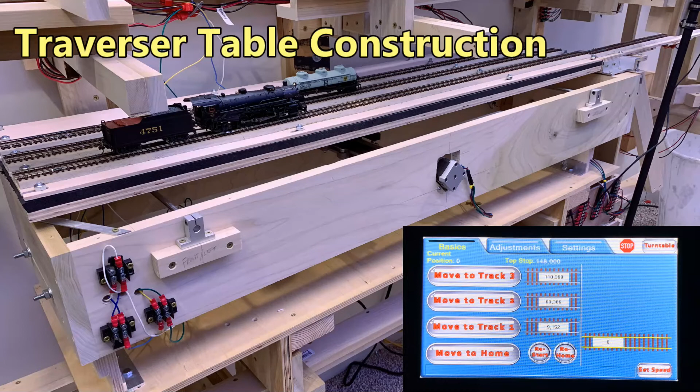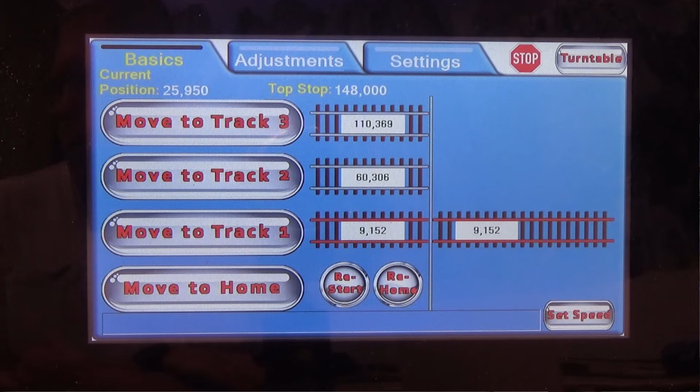So here's the final product in action. Is the view worth the climb? Yeah, I think so. We're going to see how to build a 3-track traverser table. A traverser table is a flat table that moves back and forth to align with stationary tracks on either end. It allows you to shuffle cars between the tracks without having any ladder tracks. I use it to stage trains for entry onto the layout and to receive trains coming off the layout.

Keep in mind that this is just my way of building the thing. Other folks have been successful using other techniques.

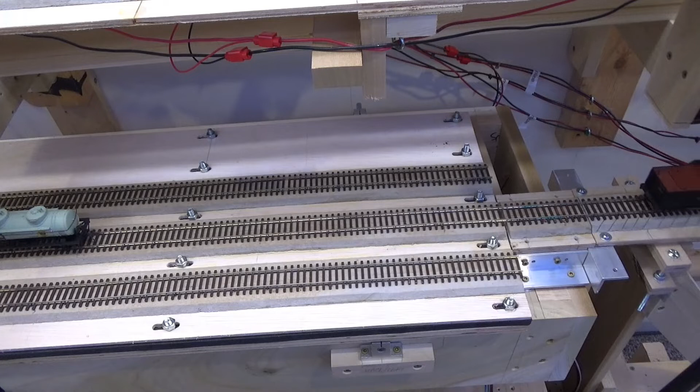What do you get for your efforts? A 3-track traverser table. There is one exit point to the right. A motorized table movement. We use a cool stepper motor for that. A touchscreen panel. We get a control panel with graphical buttons that work like an iPhone. Reliable operation. The control system hits the track stops every time. Ability to fine-tune the alignments. You can dial in the alignments darn close.

Before we get too far, let's talk about money. This is not a cheap project, but it's not $1 zillion either. It will likely cost you a few $100s plus your time. You'll need wood, bolts, screws, wire, USB cables, and some aluminum L-angle that's all easy to find and kinda cheap. We'll cover the special parts you'll need as we go along.

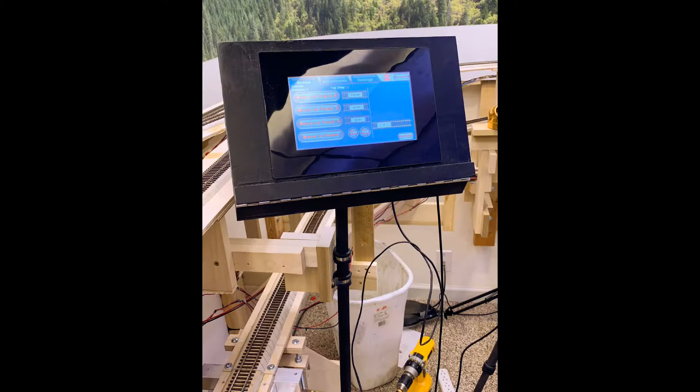I built the control system first. Ignoring the pole, it looks pretty sweet. The user interface has 3 panels. While on one panel, you switch to another by touching a tab at the top of the panel. The Basics panel shows you where the table is with relation to the transition track. Push a button to align the transition track to one of the 3 tracks.

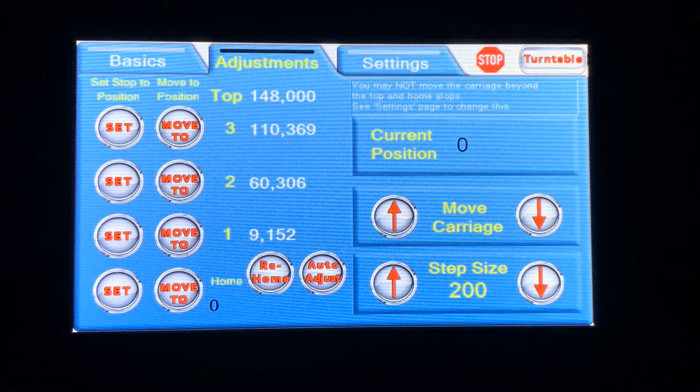The Adjustments panel lets you nudge the table up or down to line up one of the tracks with the transition track. Then you can set a track stop. Use the Settings panel to save your stop information for reuse later. We use free software to program the device, but we won't show any of that today. I'm sure you'll be happy to hear that.

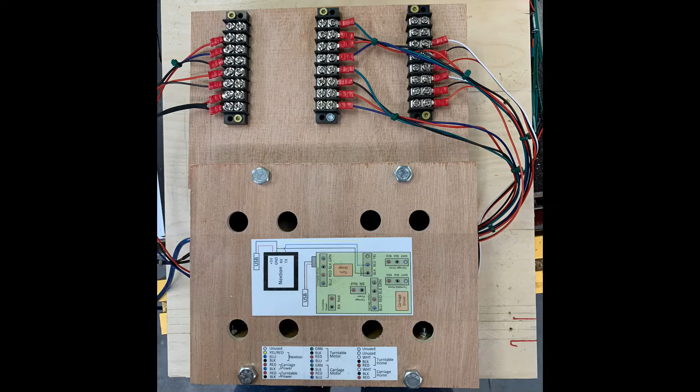All of the components for the control circuit are wired onto a single PCB board to which all the inputs were connected. The control system is driven by a custom program that is stored on an Arduino microcomputer, but we won't show any of that today either. If you build and test the control system first, you can run tests when building the physical table.

Here's the special parts you'll need for the control system. An Arduino Mega; you'll store your control program on this microcomputer. A PCB board. I use this version, but others exist. A power supply. This one is likely oversized, so choose your own. The Nextion touchscreen unit. Get this version because it comes with a nice enclosure that easily mounts in a rectangular space cut into wood. Stepper motor and driver.

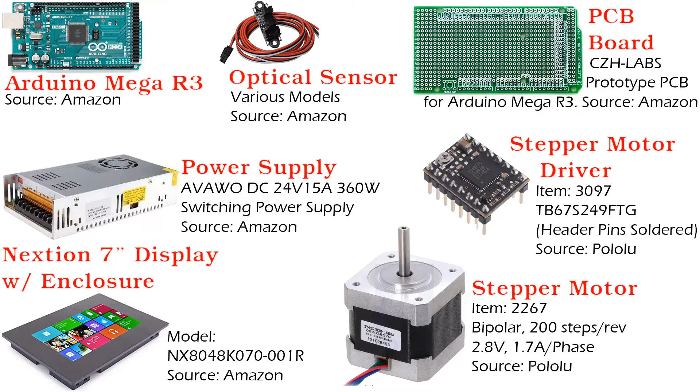Get these specific doodads because 1, they work great, and 2, my control program is coded to drive these specific devices. An optical sensor. This is used to find the home position. Amazon has many models.

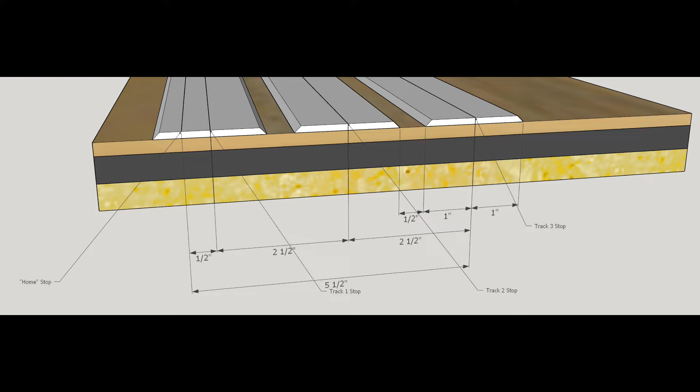Here's a model illustrating the travel distance of the traverser. The tabletop has a home stop a bit to the left of the stop for track 1. This is the leftmost limit of movement as viewed from this end. The rightmost limit of movement is the stop for track 3. The distance between these two is defined as the travel distance, and mine is 5.5 inches. I added a cushion of 3/4 inch to get what I call the working travel distance of 6.25. We need this number to decide which linear actuator kit to buy.

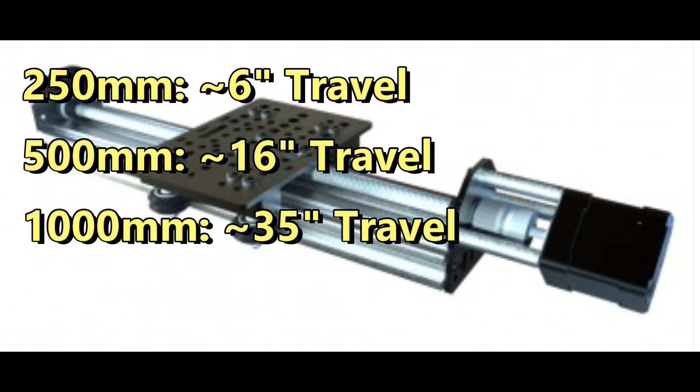Here's the traverser with the tabletop and the transition track removed. That centerpiece is called a linear actuator, and it causes the table to move back and forth. A vendor sells complete kits to make these. The Linear Actuator Kit is sold by OpenBuilds, and it's called their V-Slot NEMA 17 Linear Actuator Bundle Lead Screw. The vendor offers models with these lengths, and each has the travel distance shown here. The 250mm version looks like it might work for me.

You should order and build your kit before you do any more design work, so you have some important dimensions for subsequent design work. Here's the most important parts of the kit. Thankfully, the vendor has a video showing how to assemble it.

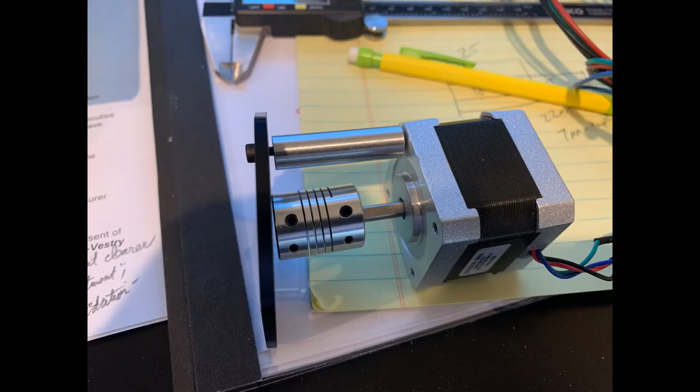But we aren't building a 3D printer, are we? No. So you do not want to just blindly follow their instructions. You need some more information to pull this off. First, I think I found a mistake in the kit.

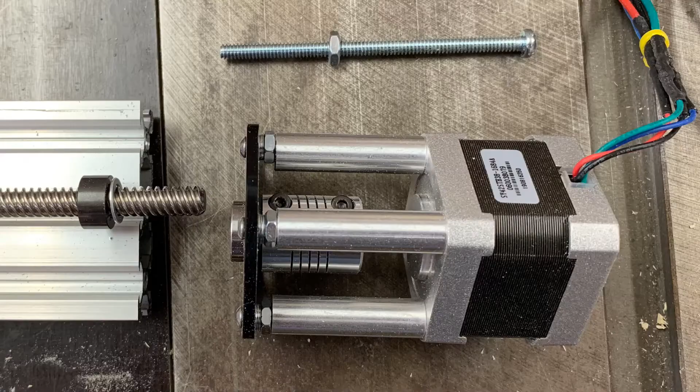The stepper motor is supposed to attach to the front end plate with 3 supplied screws. However, as you see in this photo, the screws are too short, and the long spacers are also a bit short. To fix this, I got some longer screws and used them and some jiggered up spacers to get the stepper motor properly mounted. It's no big deal, it's just something you need to fix.

The kit ships with some number 10 self-tapping screws, which the video says to use to attach the end plates to the V-Slot rail. Throw them away. Don't use them. We need the holes in the end of the rails to be tapped with machine threads down about 1 inch. Again, do not use the included self-tapping screws.

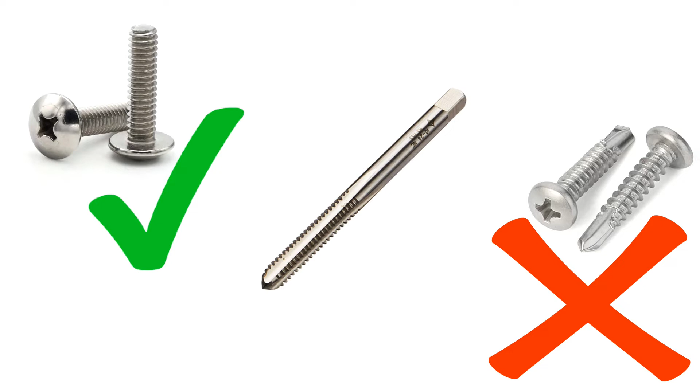Tap the holes down 1 inch with a 10-24 tap and then use number 10 machine screws. Use number 10 machine screws of about 3/4 inch length to temporarily attach the end plates to the rails. We'll replace them later with longer screws and some nuts.

At the end, the video shows that the lead screw ends nicely at the back of the unit. Well, my lead screw didn't. It extended out the back a little bit. I don't know, I don't care at this point. Enough of the scary stuff. Just watch the vendor's video with a few extra screws and spacers and you'll be fine.

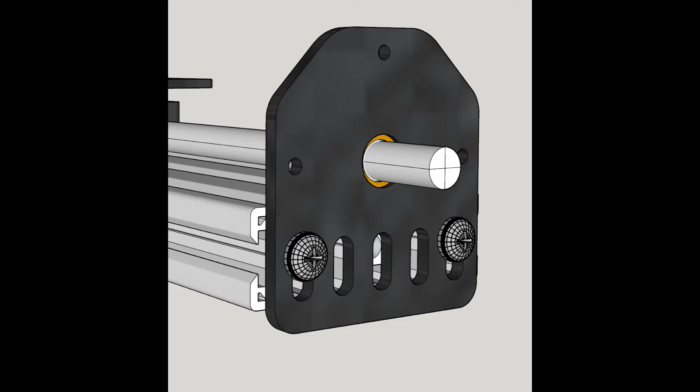After you're all done, remove the gantry plate from the unit and attach 2 pieces of wood according to the build plans. These photos show you what mine looked like. You need to ensure that your actuator delivers the amount of travel distance that you need. I'm using a model to show you how to do this because I didn't take photos of my own efforts.

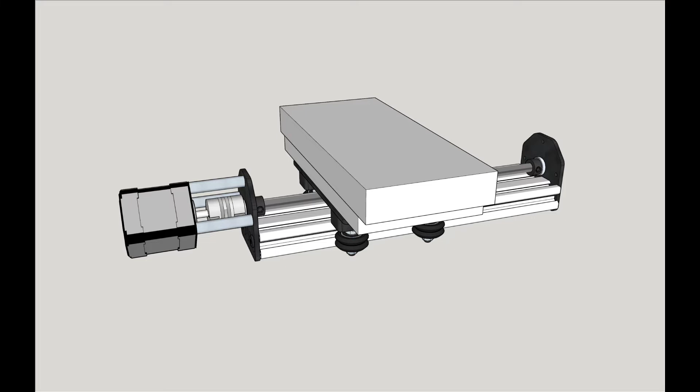Don't rely on a model. For sure, don't rely on mine. Do the process that we're going to talk about and do it in real life with a real tape measure. Place the actuator upside down on a board so that the unit runs parallel to one edge and is flush to that edge. Clamp the gantry to the board.

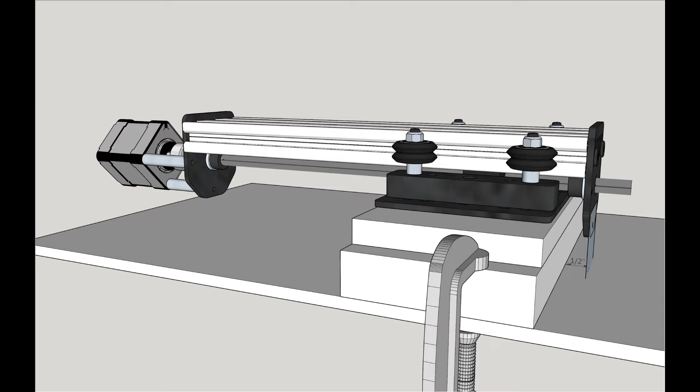Position the gantry so its back edge is 1/2 inch from the outside edge of the back support plate. You can do this by firmly pushing the gantry plate and letting the lead screw turn, or alternatively, you can turn the lead screw by hand. Mark on the board where the outer edge of the back support plate is.

Move the whole unit by turning the lead screw so that the front edge of the gantry plate is just a shade away from the last place it can stop. Again, mark on the board where the outer edge of the back support plate is. Measure the distance between the 2 marks on the board. It needs to be greater than or equal to your working travel distance. I was shooting for 6 1/4 and I fell well short.

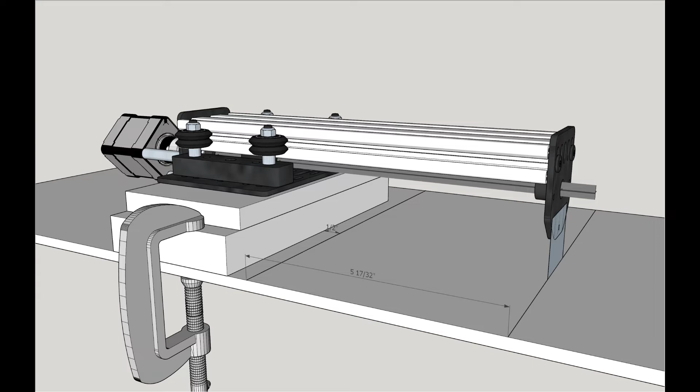I ran this test in real life and got pretty much the same answer. Not enough travel distance because at the front of the actuator, the edge of the gantry plate was hitting the front bearing too soon. The fix was to add enough washers under the gantry plate to raise it so it would clear the bearing. On the model, I just raised it magically via software.

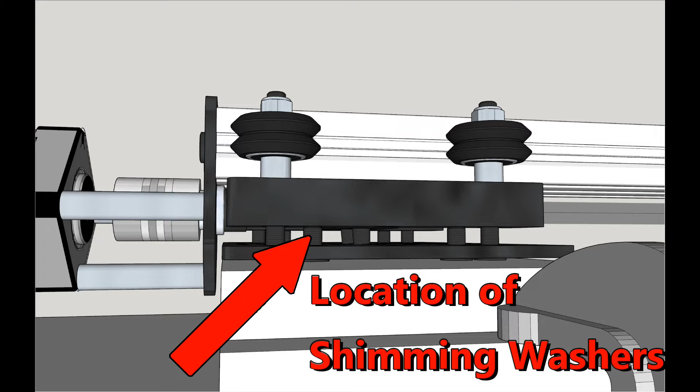Now I was able to move the gantry a little closer to the front of the actuator and I barely got the needed travel distance. In real life, my travel distance was close to 6 inches and I was okay with that.

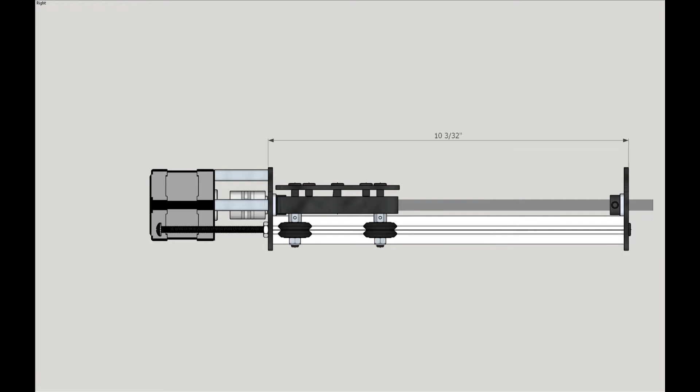To figure out the best width of the frame, we first look at the assembled actuator. Measure from the outer edge of the back plate to the outer edge of the front plate as shown in the diagram. Draw a line of that length on a big piece of paper or board. Now, on the right side, add 3/4 inches because that's how thick the frame is going to be. This represents where the back frame will be.

To attach the front of the actuator to the frame, we use 3.5 inch long screws. The screw is screwed into the rail about 1/2 to 3/4 inch, and then a nut is tightened against the front plate. Measure from the outer edge of the front plate to the inner edge of the long screw. Add this measurement to the left side of your drawing. Draw another line 3/4 inch in from the leftmost end to represent the width of the front frame.

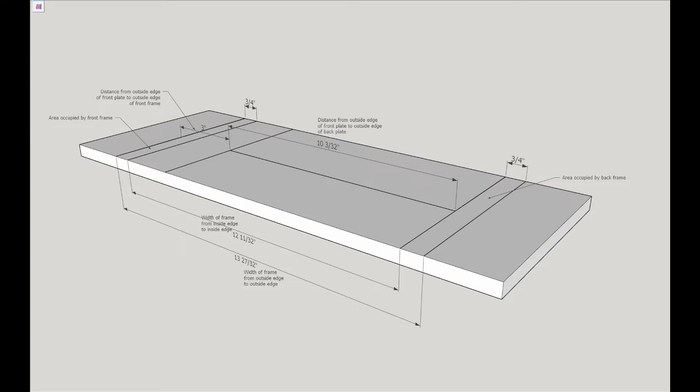This drawing shows you how to interpret your diagram. The number we really care about is the width of the frame from outside edge to outside edge. The model shows this is 13 and 27/32 of an inch. In real life, mine came out to about 13.5 inches. You can fudge maybe a little, but be careful.

My real-world efforts showed that my frame can be 13.5 inches wide outside to outside and 12 inches inside to inside. So from now on, that's what we'll use. As long as you have the frame width from the last effort, you can draw the beginnings of your frame. Do that. Just make sure the width is correct. Nothing else really matters. We want a slice of the table as seen from the right end.

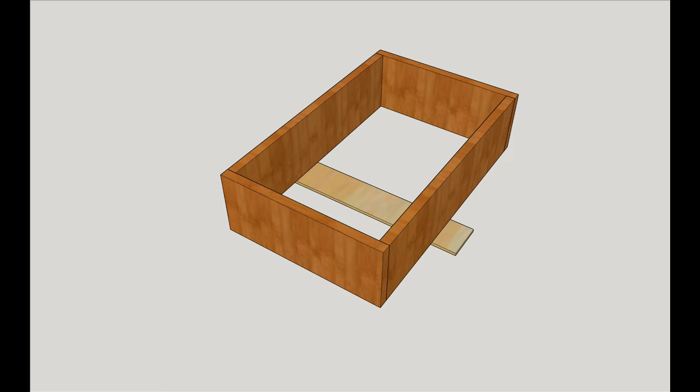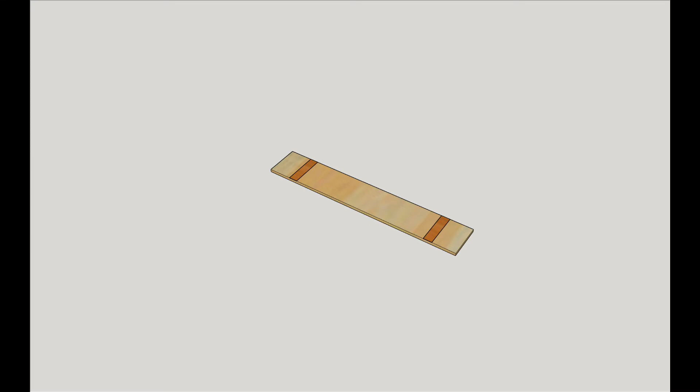Draw a narrow rectangle under the frame extending past the front and the back sides. On that rectangle, mark where the front and the back sides of the frame lay on the rectangle. Remove the frame, and we have a narrow slice with two brown parts that show where the front and back pieces of the frame are located. We've added in the important measurements for my table.

Because we moved the gantry plate 1/2 inch from the back frame earlier, draw a line 1/2 inch from the back frame now to mark that starting position. Because the gantry plate is 3.5 inches wide, draw a line 3.5 inches out from that spot. We know the travel distance, the real travel distance, is 5.5 inches, so we mark that also.

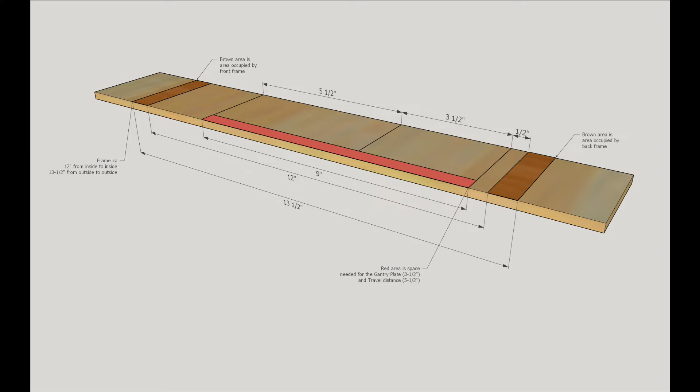The red area marks the combined length of the gantry plate width and the travel distance. Plus, and this is really helpful, it shows us where the table will be positioned relative to the frame when the tabletop is at the home position. The green area in front of track 1 is where the home stop will be. It should be enough to provide some safety space next to the home stop.

1 inch is enough. The blue area should be at least as big as the green area for weight balance. I added an extra 3/4 inch because I thought it would be smart to add a little extra weight near the back, but not too much. These are all judgment calls. The tabletop width comes out to 11 3/4 inches.

This is an excellent time to calculate where the bearing plates will be attached to the tabletop when it's in the home position. The bearing block is about 2 1/4 inches wide. The bearing plate is 4 1/4 inches wide. I decided to center the plate across the tabletop width. Doing the math, I got about 3 5/8 on one end and 3 7/8 on the other. After verifying that the bearing block wouldn't hit anything during the table's travel, I was happy.

We need to be sure that we can fit the traverse between the aisle and the back wall. The location of the exit track is the key constraint because our transition track must line up with that. The distance from the center line of the exit track to the room wall was measured in real life at 13 1/4 inches. On the diagram, I just drew a big fat line of that length.

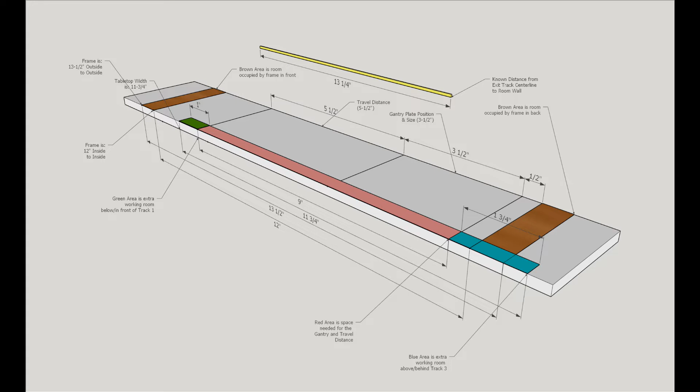The left end of the travel distance is the home stop. The center line of the transition track is 1/2 inch to the right of that. So we mark on the right side of the board where the center line of the transition track is. We move our measuring stick to line up with the marked center line. Remember that the transition and the exit track share the same center line by definition. So we are also measuring the exit track center line.

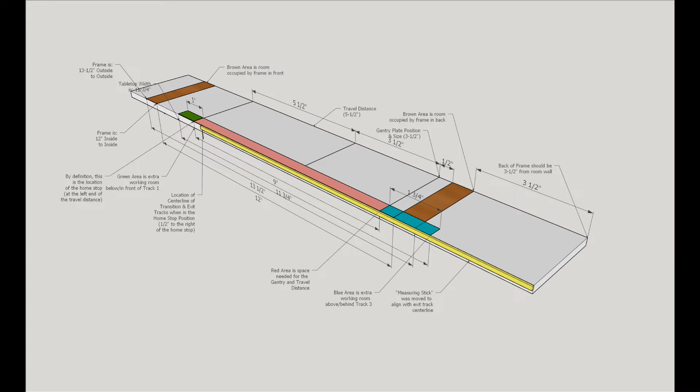Extend the right edge of our board to match up with the end of the measuring stick. We see that the distance from that right edge to the room is 3.5 inches. As long as it's well over 0, we're golden.

Draw your plans as detailed as you can. These are overview drawings of the unit we'll be building in the rest of the video. I use Sketchup to draw them. Use whatever you want.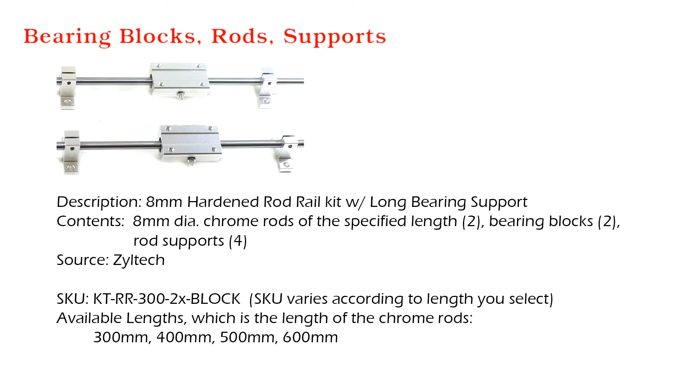The stated length refers to the exact length of the rod. The minimum size you need is the width of your frame, outside to outside, plus 2 times the width of the chrome support blocks, which is about 5/8 inches. According to the model, I need a minimum of 14 and 19/32 of an inch, which is about 370 millimeters. So I got the 400 millimeter kit.

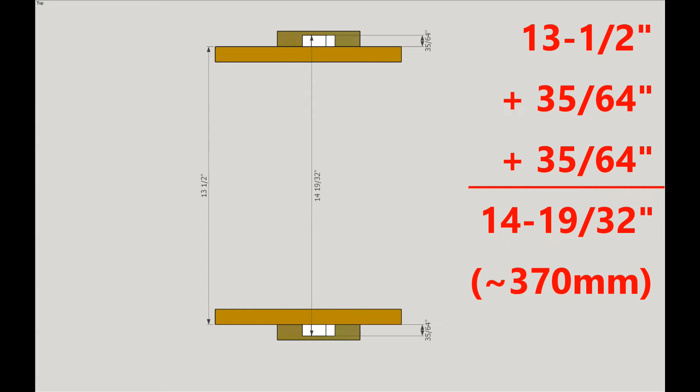This image shows what one of the 4 supports look like after it has been attached to the frame. Here's the dimensions for the support. In hindsight, I would probably make them around 2 inches by 6 inches just to give a little more room for attaching it to the frame.

After cutting the support to size, I marked the center line on top. I clamped it to another piece of wood that was around 4.5 inches high and replaced the support on the block and drew its outline. I used a centering punch to find the center of one of the pre-drilled holes in the support. The dimple helped me drill the hole with a drill press.

Screw in one side and then you're set to drill and screw the other side. Repeat this on the other 3 supports. To get the 2 pieces the exact same size, I first clamped them together and then I screwed them together. I clamped and cut the 2 pieces at one time on the miter saw.

Hey, don't even think about unscrewing them yet, because there's more fun to come. Write on your 2 joined pieces stuff that tells you which piece is the front versus the back and which direction is up and down and right and left. Believe me, you're going to forget this stuff.

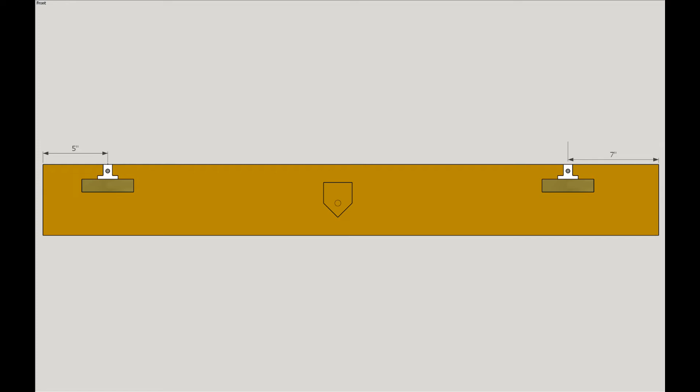This shows you where the center line of the 2 bearing blocks needs to be. Mark the center lines on the top edge, the front and back of your just cut pieces. I took special effort to ensure that the support blocks were flush with the top of the long pieces. This is critical to ensure that the rods sit level. Work with the front of the 2 pieces facing up towards you.

Clamp a backer piece of wood to the top of the 2 long pieces. Position the support block so that it's centered over the marked center line. Clamp the support block onto the 2 long pieces with the top of the support flush with the backer piece. Drill holes and screw the support block to the face of the wood. Leave the backer piece in place and repeat this process for the other end.

Use a drill press for this step. Can you use a handheld drill? Nope. I'm embarrassed to say that initially my drill press table was not perfectly perpendicular to the shaft of the drill press. So to avoid some rework, check your drill press alignment now.

Position an 8mm drill bit into the hole in the metal support piece and drill into the 2 pieces of wood with one movement. They call this match drilling. Insert one of the chrome rods into both holes you just drilled. Visually and with the aid of a level, check that they are perpendicular to the frames. Hey, don't take those 2 pieces apart yet.

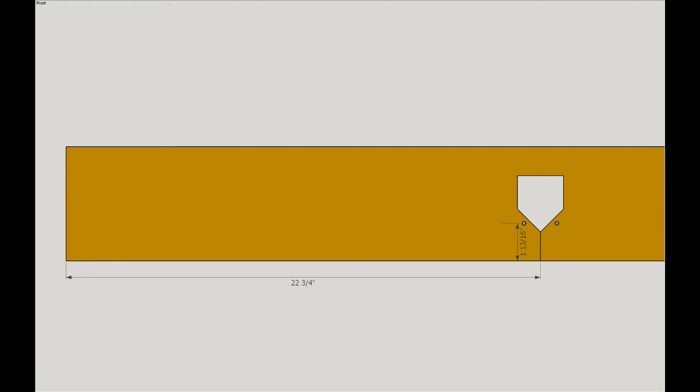We're not done. We need to match drill 2 3/16 holes, and the diagram gives us enough dimensions to get things in the ballpark. What matters is that the 2 holes are the exact correct distance apart and they are as level as possible. The good thing is we'll use the end plate as a template later to get the 2 holes the right distance apart. From the left end of the front piece, mark off a line at 22 3/4 inches, and it doesn't need to be exact. Somewhere there is close.

Cut a spacer plank of wood that's about 24 inches long, 3/4 inch thick, and close to 1 13/16 inches high. Mine was the length of the whole front piece, but you don't need that long. Just make sure that the piece is the exact same height, around 1 13/16, or close to it, from end to end. Clamp the spacer plank along the bottom edge of the front piece.

Remove one of the end plates from the actuator. Position it as shown. To get the correct alignment, do this. Get a 3/16 drill bit with a brad point to use as a center punch. Place the end plate along the top edge of the spacer plank and make sure it is always touching. Slide the end plate until the plate is roughly centered over the vertical line you just drew. Put the drill bit in the rightmost slot and make sure it's touching the top of the slot. Tap the bit to make a nice indent.

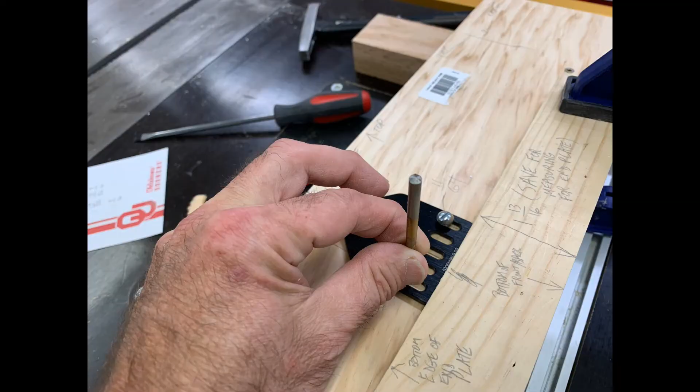Remove everything from the wood and use a 3/16 bit in your drill press to match drill a hole through the 2 pieces at one time. Now remount the spacer plank as before. Insert a number 10 screw through the right slot of the end plate and then into the hole you just drilled. The end plate should be flush against the top of the spacer plank. Secure the screw with a nut.

Place your 3/16 drill bit, that one with a brad point, in the left slot this time, and make sure it keeps touching the top of the slot. And also make sure the end plate is flush against the spacer plank.

Tap the drill to make an indent and match drill the hole as before. Now you can unscrew those two long pieces of wood from each other. On the front frame, reattach the end plate where it just was. Slide it down until the screws are touching the top of the slots.

Using the end plate as a template, drill a hole as big as the big hole in the template as shown here. This gets you started making that goofy shaped hole in the front frame.

To attach each of the other two bearing block supports, use a chrome rod to hold a support in place, along with clamps, as you drill and screw the support to the face of the frame. It would be best if you also clamped a piece of wood to the top of the frame to keep the block flush with the top.

Here's a diagram that shows the shape and size of the goofy hole in the front frame. While SketchUp can produce dimensions down to a gnat's eyelash, we don't need that kind of precision, but you do need to be as good as you can get. We just need a hole that the stepper motor can slide through without hitting anything. As you'll see, my final hole looks pretty ugly, but I got the clearance I needed.

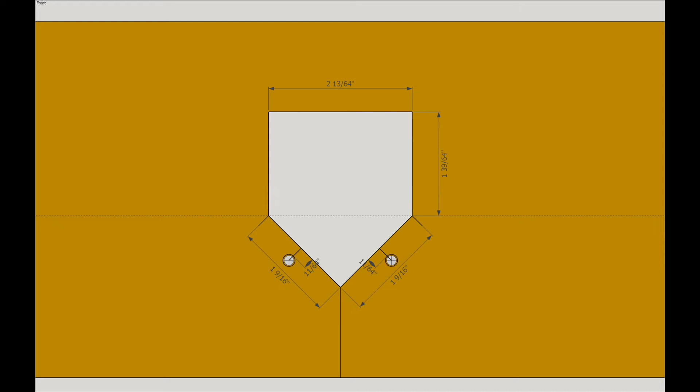Here's what is important. You see that 11/64 of an inch worth of wood between the screw holes and the slanted edge of the hole? Watch that. Keep that small piece of wood from getting too thin.

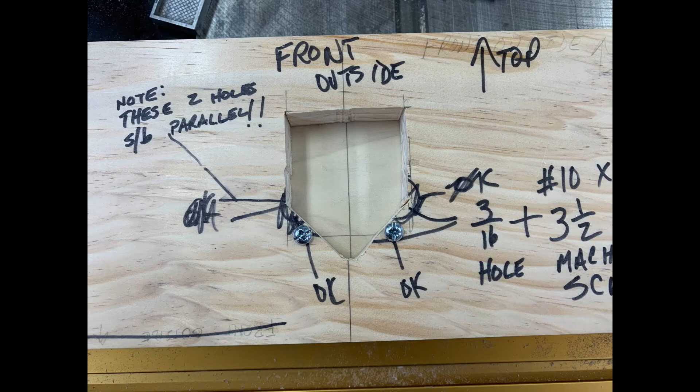I suggest you make a template on a smaller piece of wood and use that to mark an outline on the real frame. Using the template, I marked the outline and then drilled big holes just inside the markings to remove lots of wood. You can use a scroll saw or a saber saw to cut off the remaining largest chunks. Then use a rasp and a file to clean it up. Again, be careful as you cut near those two mounting holes.

I've drawn the back hole as a square hole, but you can cut it as I did with round edges. Use the same template technique as before.

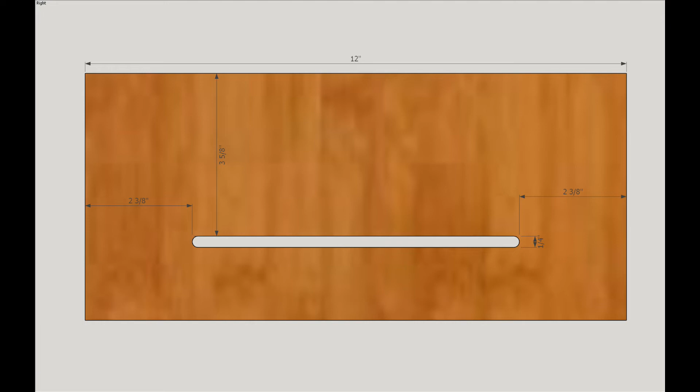The middle cross piece is close to the right end. It will be attached to the other vertical support and is also slotted for the same reason. The right end is just a plain piece of wood with no slots. Yes, you'll need to build those 2 spacer pieces also. No big deal. Since building these pieces is nothing special, we won't spend any more time on them.

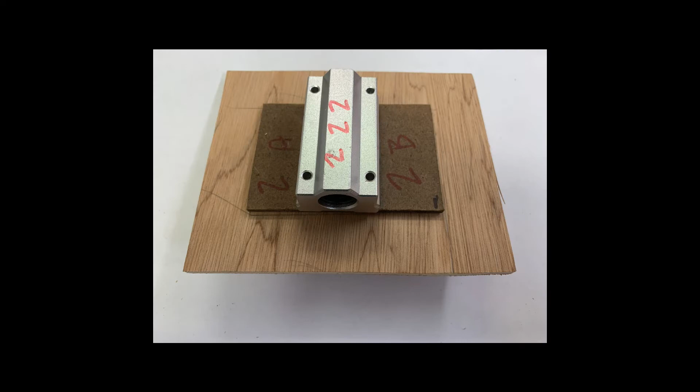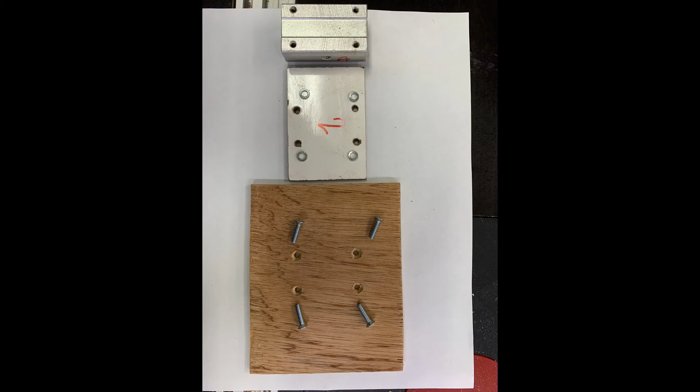Here's what we're after. Actually, 2 of them. We'll attach 2 pieces of wood to the top of the bearing block to get the height we need and to allow us to attach the plate to the underside of the tabletop. Pretty basic, really. Cut out the 2 rectangular pieces according to the plans, or close enough. Get some appropriately sized metric screws that will reach down through everything. Drill the holes in the right spot, countersink the holes in the top of the top piece of wood.

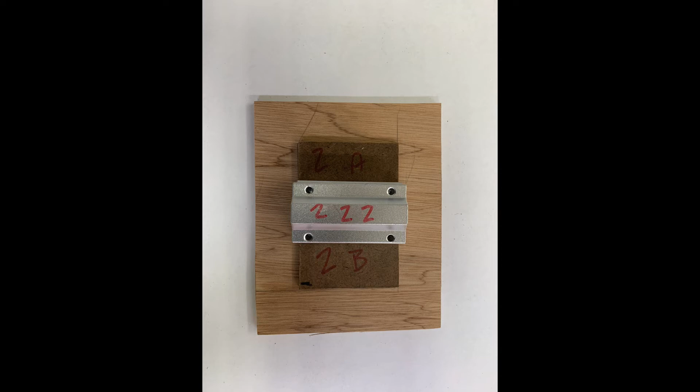Here's what a bearing plate looks like on top. Full disclosure, this was my first attempt and it was not high enough. It turns out that light brown part was actually sitting low enough that it hit the frame when I moved the table. Bad news bears.

My solution was to use 4 nuts as spacers to raise the top piece of the plate. A better solution is to use 3/8 inch plywood, so that's what's in the build plans. I didn't want to replace the pieces I already cut, so I raised each one of them with some properly spaced nuts repurposed as simple spacers. It worked out okay.

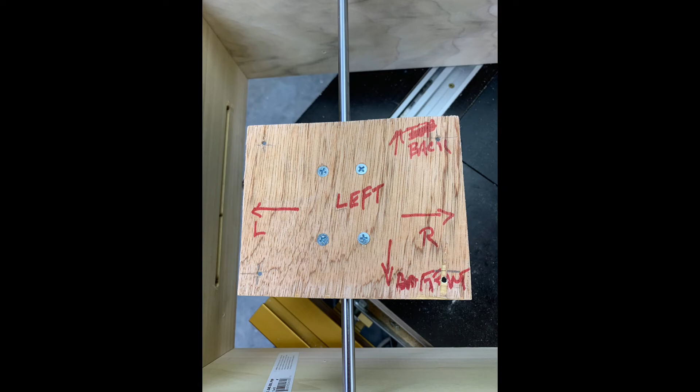Pretty easy, really. Slide a chrome rod through one of the bearing support blocks at one end, and once you're in, slide on one of the bearing plate thingies we just made. Then you want to push the rod through it until the rod reaches the opposite frame.

Push it through the hole, through the bearing block support on the front frame or wherever, until the rod is flush with the front of the support block. Then tighten the set screw. Do the same thing for the other plate.

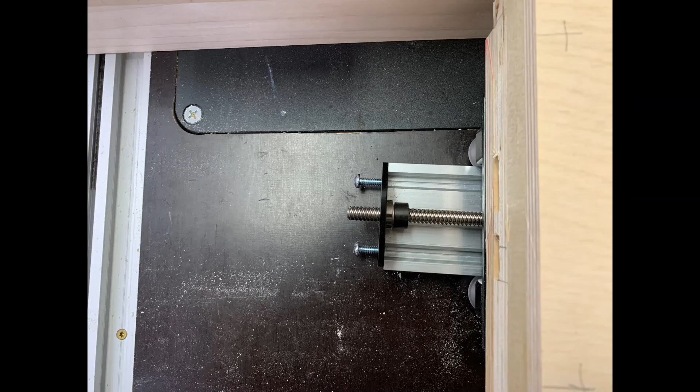Yeah, that one was easy. This one ain't. Because the actuator cannot be wrangled into place if it's left fully assembled, we remove the stepper motor and its associated little parts. Place the actuator between the front and the back pieces of the frame. Attach the actuator to the back frame.

Here it is approaching the back frame with its mounting screws and end plate still in place. Remove the mounting screws, end plate, and other small parts. We don't want to release the locking collar, however, from the lead screw. Push the mounting screws through the 2 holes and then slide on the end plate, bearing, and washer.

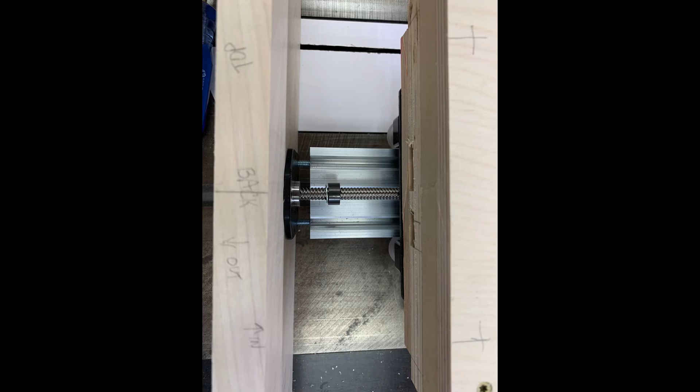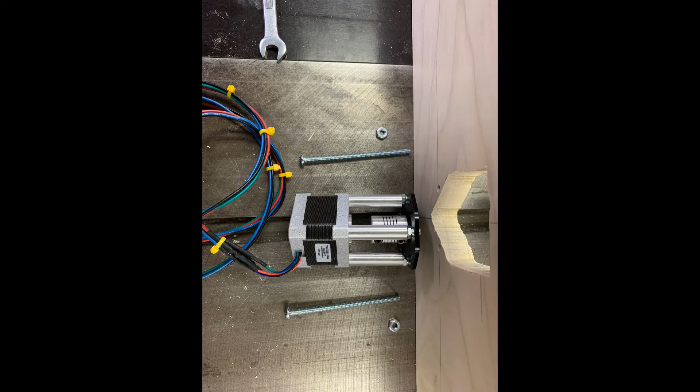Slide the actuator up to the 2 mounting screws. Prop up the front end of the actuator to keep it level. Jiggle everything into place and screw the mounting screws into the rail, but don't fully tighten yet. This is what it looks like in the front after you're done attaching the actuator in the back. The stepper motor is initially outside the frame along with the 2 mounting screws and nuts.

A lot happened since the last photo. Because the end plate won't fit through the opening in the wood, you need to detach the end plate from the stepper motor, put the end plate inside the frame, and then reattach it to the stepper motor. Given the tight quarters, this takes at least 1 beer. We have pushed the 2 mounting screws through the frame and threaded a nut onto each screw.

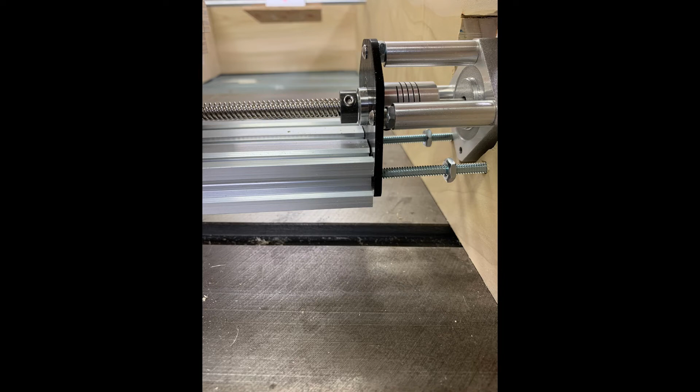Push the mounting screws through the slots in the end plate. Push on the stepper motor until you can jiggle the lead screw into the coupler, as well as line up the 2 mounting screws with the holes in the ends of the rail. Try to get the unit as level as possible in both directions. Then screw in the front screws until they're fairly tight. Tighten up the back screws, and then finally, when all feels good, tighten the nuts up on the front end plate.

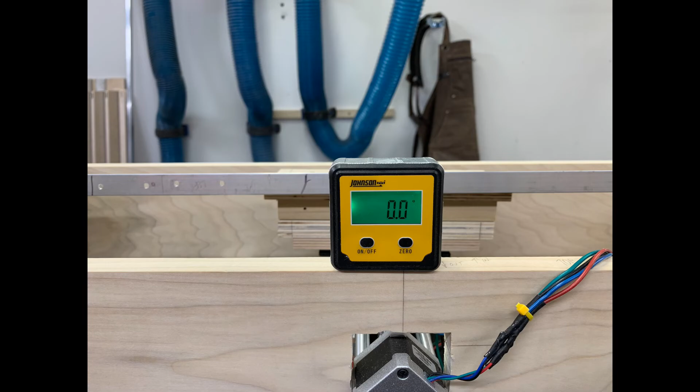The tops of the 2 bearing plates and the wooden gantry platform need to be even with each other to ensure smooth operation. Here's a level along the frame. It's at 0 degrees. Here I placed a piece of aluminum angle across the 2 bearing plates. The same calibrated level placed on that aluminum reads 0.1 degree. That's good enough for me. But what if it isn't? Well, you could add shims under one of the bearing plates to compensate.

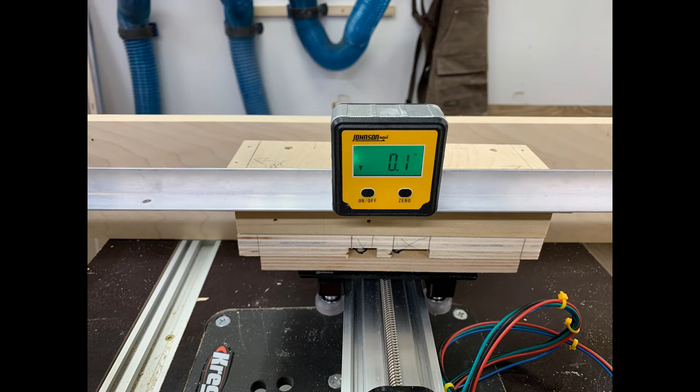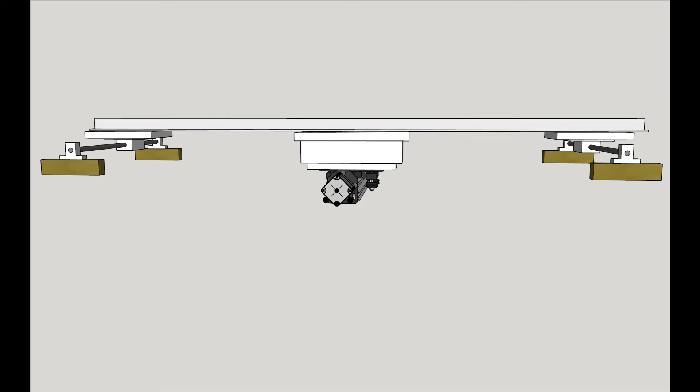Now, we need to get the gantry plate even with the 2 bearing plates. Put the aluminum angle across all 3 plates. Cut a piece of wood that will be screwed to the top of the other 2 pieces. On that 3rd piece of wood, try to get at least one side of the gantry plate pretty close to the level of the bearing plates, but still positioned a bit below the level of the bearing plates. Count on one side being a little better than the other.

Now, use shims of metal and paper to get the entire gantry top even with the bearing plates from end to end. Mine ain't pretty, but it got the job done. Eventually, I'll use clamps and positioning jigs to keep the tabletop in the correct position while we attach it to the gantry and bearing plates.

This shows the key dimensions of the jig that's used in the lower right corner. To aid in using the jig later, make sure that the depth dimension, in my case 2¼ inches, is the same distance that the bottom edge of your table will be from the front edge of the front frame. This diagram shows the piece at 1 inch thick. Adjust yours to whatever works for you. The top edge of the piece should be close to the middle of the bottom plywood. Screw it into the top of the frame so you can align the next pieces.

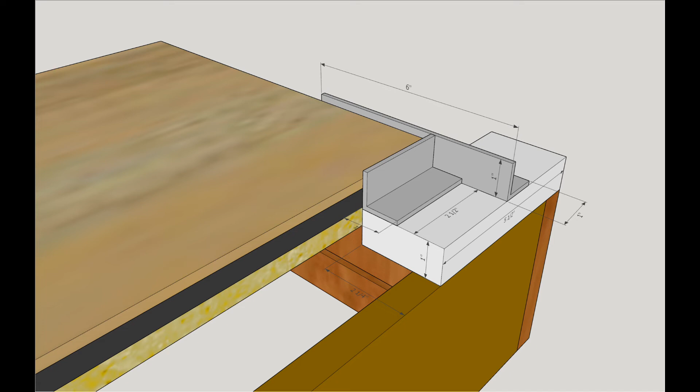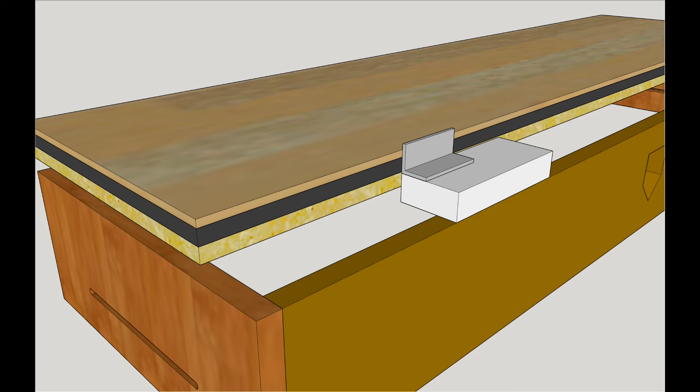Cut the aluminum angle pieces and position them as shown. The exact lengths aren't really that important. Just make sure the faces of the aluminum angle pieces are correctly positioned. Cut the other jig to the same size as the first one. Position it near the left end of the frame with the bottom edge flush with the face frame. Cut a piece of aluminum angle and screw it in like you did before. Ready for duty. Screw them in now because you'll need them in the next phase.

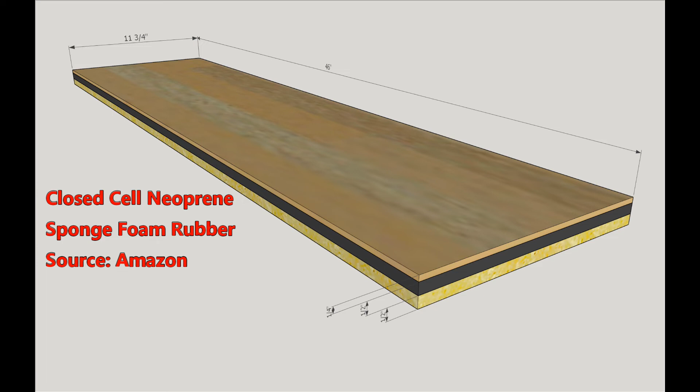Cut your 3 pieces to the size as indicated. For the top I used 1/4 inch Luan plywood, which isn't really a 1/4 inch, but you know. The middle is made of 1/2 inch closed cell neoprene sponge foam rubber. You can get it on Amazon. I recommend that you actually use 3/4 inch instead. The bottom is 1/2 inch plywood.

For the bottom, please get the best plywood you can afford, and do not, I repeat, do not use MDF or particle board. Place the Luan plywood on the table so it's flush with the right edge of your positioning jig. Gently move it up, trying to keep it from moving left or right until you see the two bearing plates and the gantry platform.

Use a square to mark vertical lines to tell you where the bearing plates and the gantry plate will be. Draw your lines and mark up the areas clearly as no drill. Because I had built a previous table, I had a Luan template with the necessary slots already routed out. I laid that template on the Luan plywood to mark out the slots for the right side.

Each slot is 1/4 inch wide and 1 inch long. Check the build plans for more details. Mark out where your slots should be. Make sure you don't mark any slot cutouts in the no drill areas. Route out the slots. On the left end, you route the slots all the way through the end of the plywood. We'll join the 3 layers in the order shown here.

Secure the foam to the 1/2 inch plywood with tape. It's best to position the foam just shy of the right edge of the bottom plywood, although this might be a little overkill. You just want to avoid the foam rubbing anything as the table moves back and forth. Carefully align the Luan plywood on top with its edges matching those of the other 2 layers.

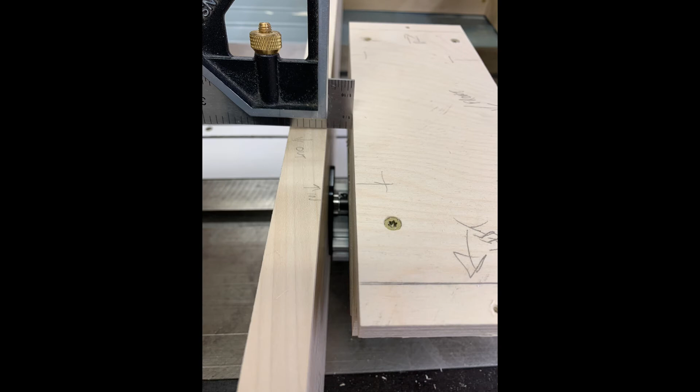We get the actuator into the home position, which is with the back edge of the gantry plate 1/2 inch from the inside of the back frame. Flip the frame upside down. Make sure your actuator is still 1/2 inch from the inside of the back frame. Slide the tabletop under the frame and move it so that the edges line up with your positioning jigs. Use some long clamps to hold the tabletop firmly against the positioning jigs.

Before you commit, verify that the tabletop is firmly against the positioning jigs. Verify that the back edge of the gantry plate is 1/2 inch from the inside edge of the back frame. Verify that the tabletop is touching both bearing plates and the gantry plate by sliding something between the tabletop and the plates. If you get a different level of resistance, check your overall level. Don't get in a hurry. Make sure everything is as perfect as possible before moving on.

I used a pre-cut measuring stick to position each bearing plate and then screwed it to the tabletop. I then screwed the top part of the wooden gantry platform to the tabletop. Physically push the table back and forth to make sure that nothing gets in the way of anything else as it goes all the way from the front to the back.

No detailed plans for this because there's about a zillion detectors you could use. We use the same 3/4 inch stock that we've used for everything else. I built a good sized base for the detector to sit on, and note that I had to file out some small slots so that the PCB board would sit flat. Hook up your control system so that the detector will light up when triggered.

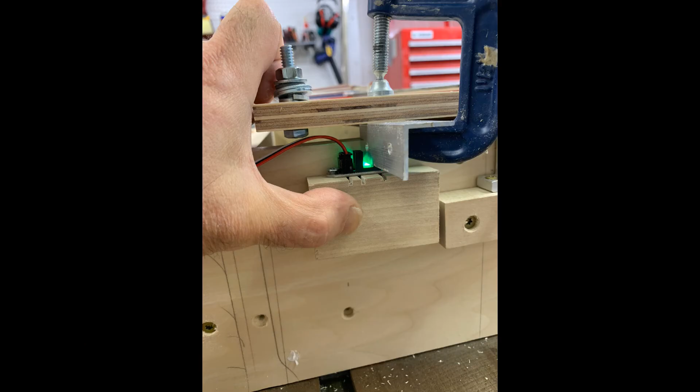Move the table to the back. Clamp a piece of aluminum angle as shown. Put the detector on the outside of the frame and position it so that it lights up. Give a little wiggle room vertically. Mark where the bottom of the detector is on the face of the frame.

Remove the detector and the aluminum angle, push the table out of the way, clamp the detector back where it was, and drill some holes through the detector base and into the frame. Remove the detector and complete drilling the holes through the frame. Put the detector on the inside and screw it in. Put the table in the home position using your positioning jigs. The detector is firmly in place and the tabletop is at the home position.

Cut a piece of aluminum angle like this. I use the same 1x1 aluminum angle I've used everywhere. Note that it has adjustment slots. It should be about 3 inches long. Put the angle piece in place so that it lines up with the gap in the detector and is just shy of making it light up.

Put in your screws so that the adjustment slots will allow you to slide the piece up and down enough to hit the gap. Get the screws just shy of tight. Move the piece up and down to light up the detector. Then tighten up the screws. Drill a hole to feed the wires through and fix up some sort of strain relief.

That was quick, huh? This is just standard track laying stuff. I should point out, however, that on the right end, closest to the transition track, I made sure that the road bed was just a hair shy of the end of the plywood, because as the table moves back and forth, I didn't want the Homasote to have any chance of obstructing the table movement.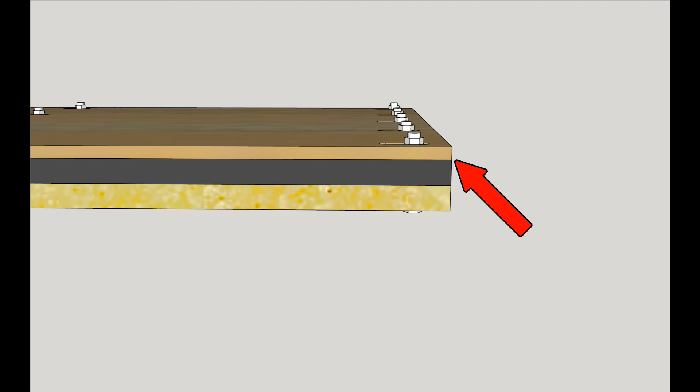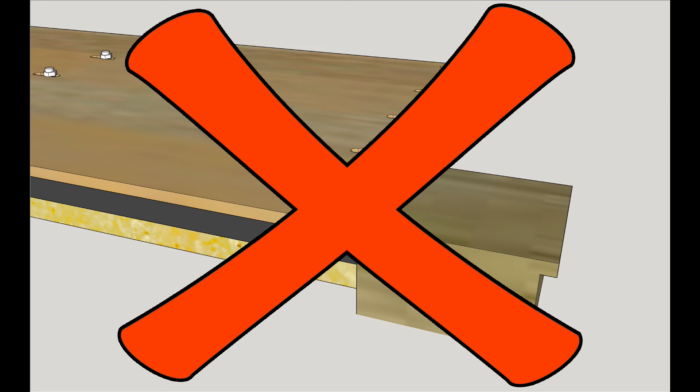Loosen all of the nuts on the top of the Luan plywood so you can move the Luan plywood back and forth. Slide the Luan plywood so that it's exactly even with the bottom layer of plywood. The foam and the bottom plywood should not be moving. Now tighten all the nuts just enough to secure the top plywood from moving. The tabletop height is now at its highest possible elevation. We do not want to match the transition track to this elevation because that gives us no room for adjustment.

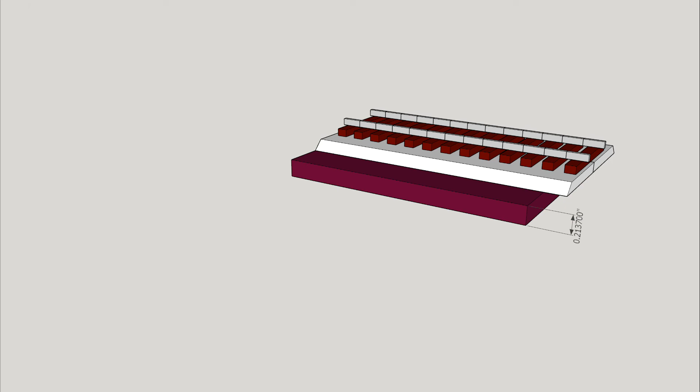I got a scrap piece of wood that was a bit narrow and ran it through the saw with small cuts until it was the same height as the tabletop is now. To determine the desired thickness of the piece of the transition track that touches the exit track, go to your exit track and measure as precisely as you can the thickness of the plywood at the end of the exit track. Let's say it was 0.2137 inches.

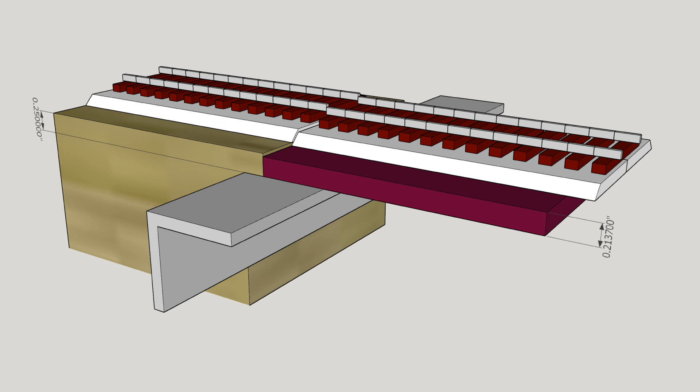The thickness of the thin side of the transition track should be just a hair thicker than that because, at least on my layout, I can easily shim the exit track up to the level of the transition track, but it's really not practical to shim the transition track up to the level of the exit track. So I use my best table saw skills to cut a series of grooves to make that rabbeted end look like this, and the thickness of that top thin part should be very close to 0.25 inches.

Cut off one end to get the part to the correct width. Now, remember that narrow piece we cut to the exact height of the tabletop? Use that to set your saw fence. Then move your fence a little bit closer. Make test runs with scrap pieces until your scrap piece, when placed on the frame, comes up to the level you are happy with. After you're dialed in, run your real piece through. Then, cut off the end opposite the rabbeted end to get the correct length. This is a good height for the transition track.

Cut a piece of 1x1 aluminum angle and screw it into the end of the transition track. This was an early attempt. The final piece was actually a little bit longer. Of course, I also laid track and attached feeder wires. I took the transition track to the exit track and clamped it into position. I match drilled a hole through the wooden border of the exit track and the aluminum angle beneath it. Then I inserted a screw and a nut and tightened it pretty good. I clamped the piece again and drilled the same type of hole in the right border of the exit track.

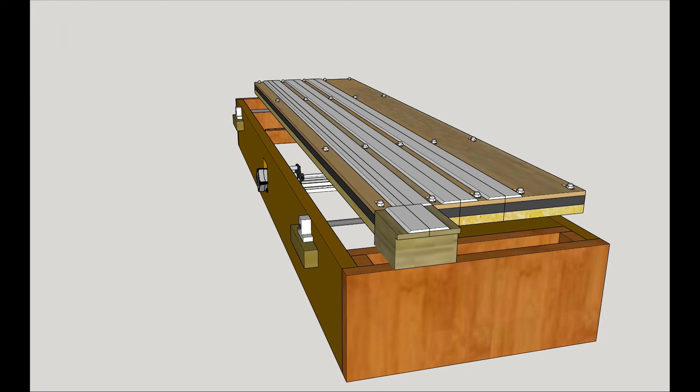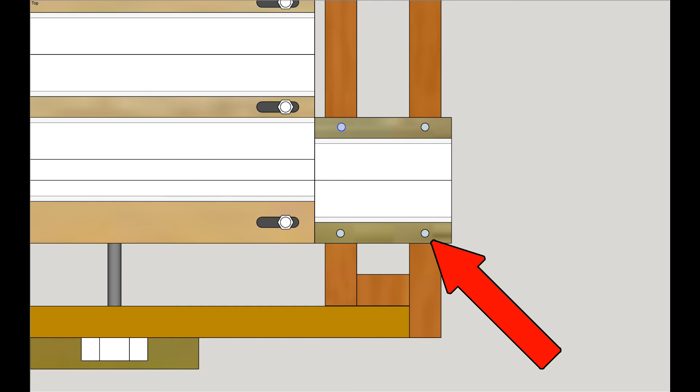Hook up your control system and have the table find the home position. Position the transition track so that its front edge is even with the front edge of the tabletop. This should put the center line of the transition track about a ½ inch away from the track 1 stop. I know this diagram doesn't show the tracks. Big deal. Do a pre-position and mark and drill holes in just the borders of the transition track, but not the frame. Just make sure the transition track center line is pretty close to a ½ inch away from track 1 stop.

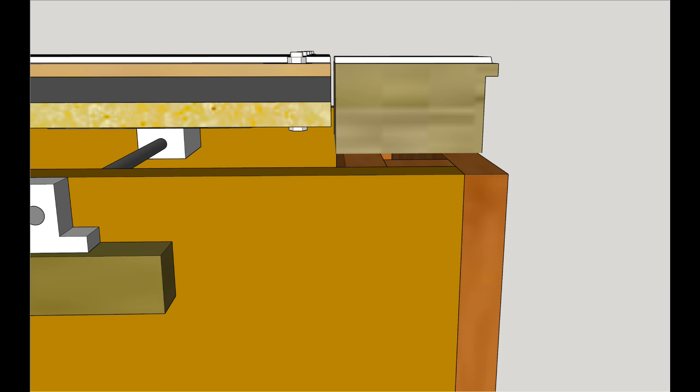The most important distance is how far the left edge of the wooden block of the transition track is from the right edge of the tabletop. I can't give you a measurement, but it should be as close as you feel comfortable with that ensures that there is absolutely positively no contact between the tabletop and the transition track as it moves back and forth completely. I made my best guess and clamped the transition track in place and then manually moved the table along its entire width. Once all was good, I drilled holes in the frame and secured the transition track to the frame.

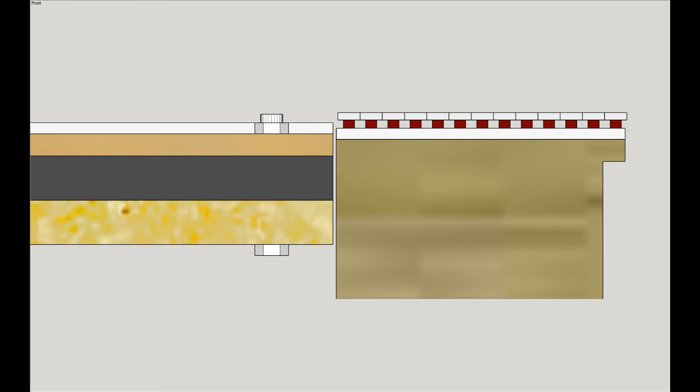I used the nuts on top of the Luan plywood to move the top laterally just a smidge when laying the track for track 1 so that I got things right where I wanted them. Then I snugged them up to lock that lateral movement. I used flex track. Now the shortest length of the tabletop allowed the rails of the flex track to actually move a bit if there was any jostling.

To address this potential problem, I used track spikes to secure the ties, and I alternated the sides on which I installed the spikes to make sure the webbing was not going to move laterally. I then made sure the rail was exactly where I wanted it. Finally, I used CA to permanently bond the rail to the ties in just a couple of places.

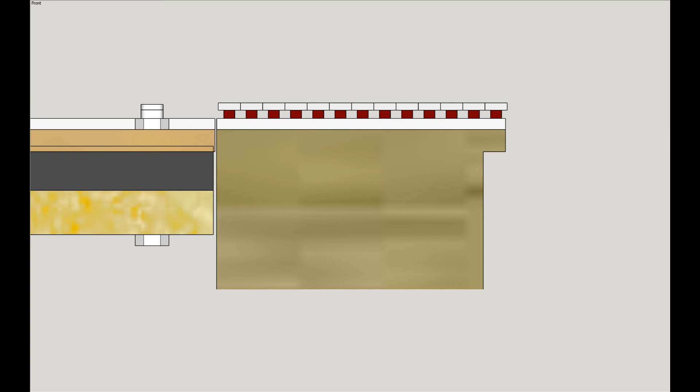Once I had the track installed for track 1, I used the nuts on the right end to push the plywood down to get nice vertical alignment. It was during this effort that I kind of wish I had used 3/4 inch foam instead of 1/2 inch. I then used the control system to move the table to get track 2 aligned with the center line of the transition track and redid the same process, and the same thing with track 3.

I attached track feeders to all the rails and attached them to barrier strips so that I can connect to track power easily later. I also installed similar barrier strips at the transition track end of the table.

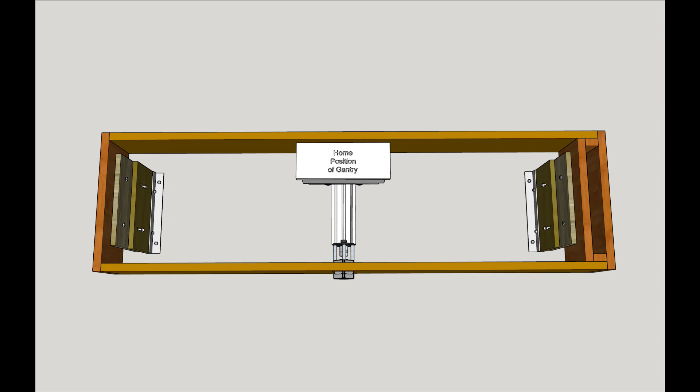This shows you where the end supports are located with relationship to the frame. Both of them have the same dimensions, so build 2 of them at one time to save yourself some time. All the bolts are 1/4-20 and all the routed slots are 1/4 inch. All the aluminum angle is 1x1. Here's the dimensions of the parts of the supports. There's nothing special about the build process for these parts, so we'll just move on.

Consult your own plans to determine where the bottom bearing plywood should be positioned. I added some horizontal pieces to the supports to make it easier to secure the bottom bearing plywood. I made sure that the front edge of the supports were positioned at exactly where the front edge of the bottom bearing plywood should be.

Wrangle the plywood over the 2 supports, line up the front edge, move it laterally until it's good enough, and screw it into place. This should be good grade plywood that can hold the weight of your table. I used 1/2 inch and it's fine. I put the traverser unit on a table so the ends could hang over. I bolted the end supports so that the table was level and would almost reach the final elevation.

This takes 2 people. Move the unit so that it's sitting on the bottom bearing plywood. Move the unit up and over until the transition track mates up with the exit track. Yes, this does take some finagling, clamping, screwing of bolts, etc.

The goal is to have the transition track mated up with the exit track with the screws, and to have the overall table as square as possible, and with the aluminum angle at the bottom sitting perfectly flat on the bottom bearing plywood. Not easy, but doable. Make sure the transition and exit tracks are mated well, that there is virtually no gap between the transition and exit track, and that the screws that attach the aluminum angle to the exit track are tight.

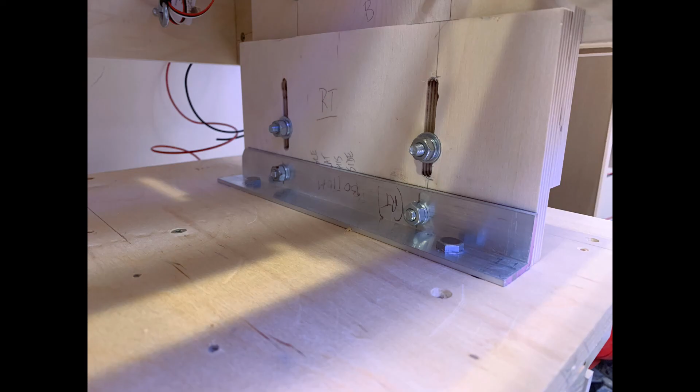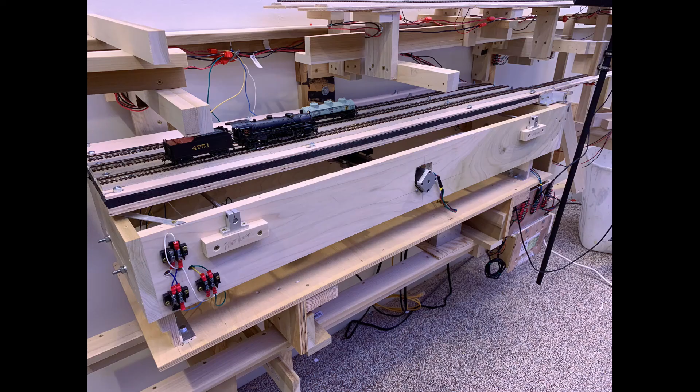Go under the table and drill holes in the bottom bearing plywood to match up with the holes in the horizontal legs of the aluminum angle that's sitting on the plywood. Then bolt everything down. Hook up all your pieces and parts of your control system. Hook up your track power. Fire up your layout. Give it a go. It'll work.